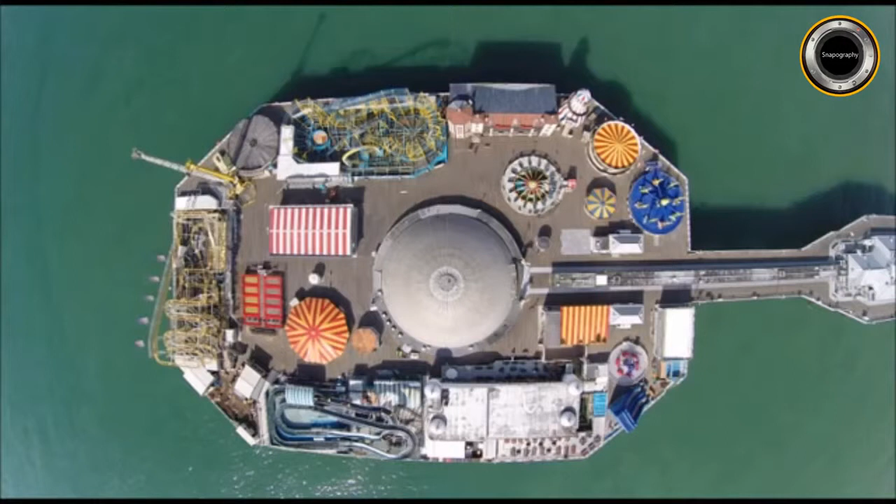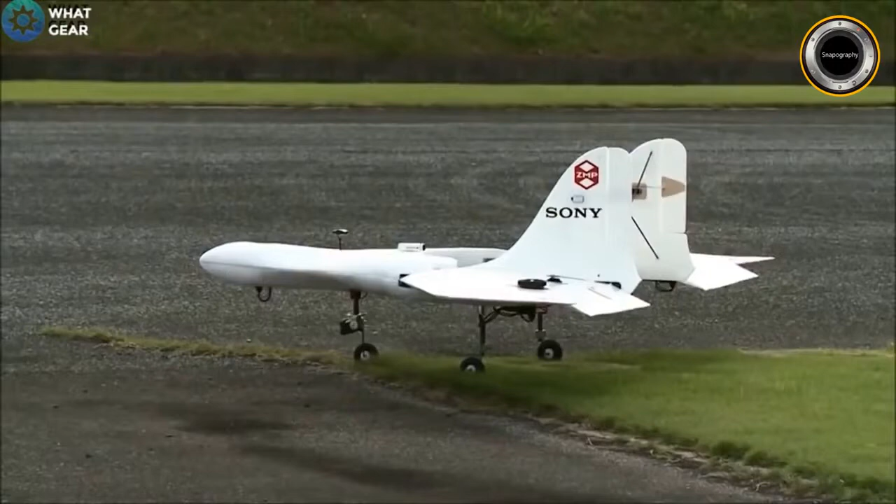Sony have partnered up with the robotic startup company ZMP in a joint venture they're calling AeroSense. Together they've created this amazing aircraft drone which has the ability to take off vertically, just like that Lockheed Martin F-35 fighter featured in Die Hard 4.0.

And before any of you remote control model airplane fans get excited, don't, because this aircraft will not be for the consumer market. They'll only be available to businesses for recon and surveillance purposes.

It's been said that this drone can carry up to 22 pounds and fly for 2 hours straight at speeds of up to 106 miles per hour, which means that in theory, you could send this down the shop, pick you up a 6-pack of beers and fly them straight back to you before you even put your feet up to watch the game. But something tells me that will probably never happen.

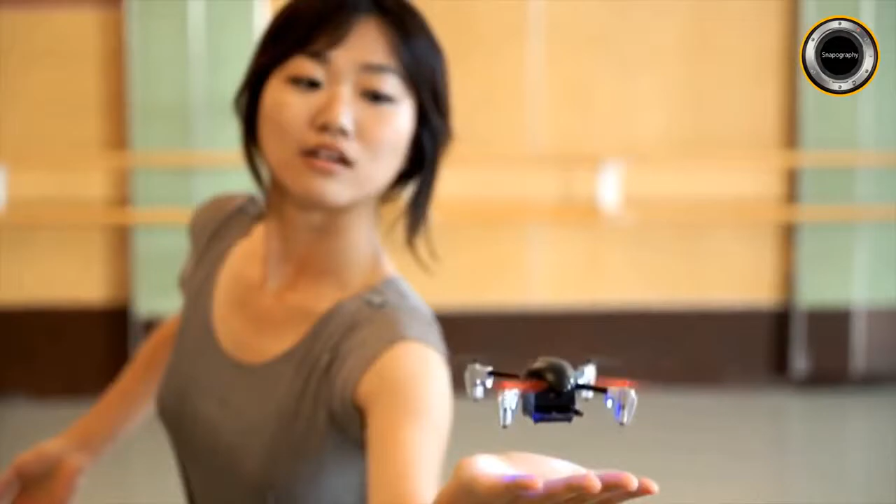When we began on Microdrone, our aim was to create a small-size, personal drone that was affordable, durable, easy to fly, that works straight out of the box. A drone for everyone. Whether you fly Microdrone in extreme conditions, like on a windy beach, or in delicate ones, like inside your home, with its precision control, flexibility, and durability, you can fly it anywhere, no matter your age or flying experience. There's no other drone like it.

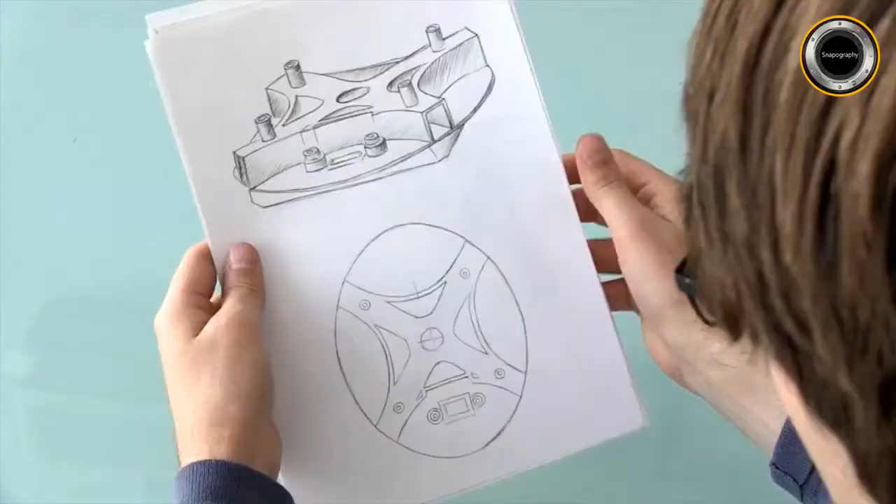We're ready to make Microdrone 3.0. It's designed with drone enthusiasts and excellent engineers from around the world. Components are easily expandable, upgradable, and replaceable. It's also the smallest drone to currently carry a mechanical gimbal.

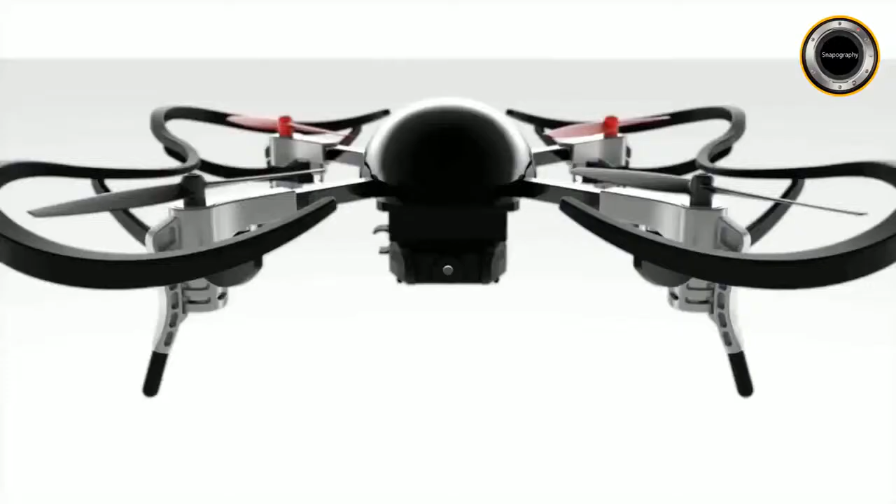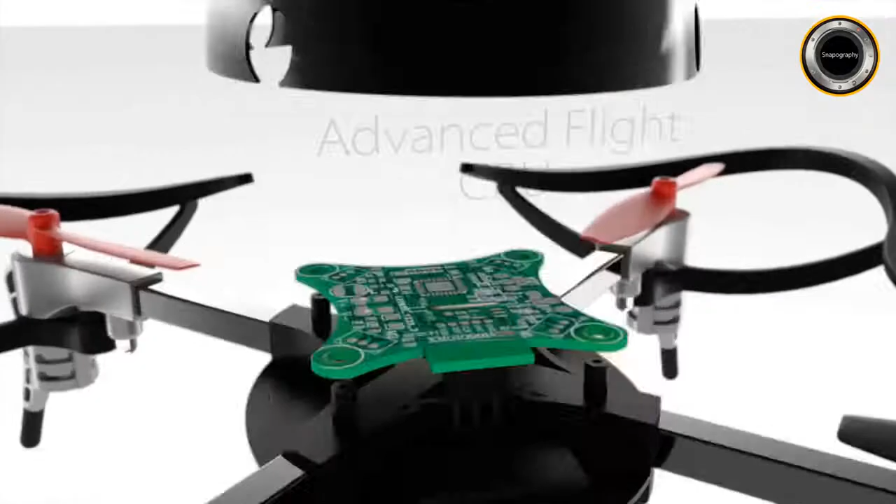The HD camera streams live footage to your smartphone. The batteries slide in and out for quick hot swapping. And the plug-and-play smart modules simply snap on with magnets. Since everything either snaps or slides in, the structure is sleek, aerodynamic, and beautiful.

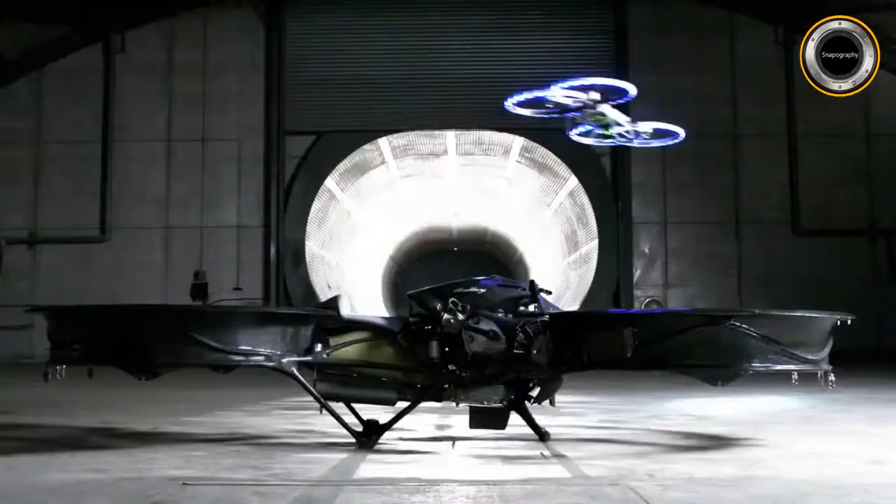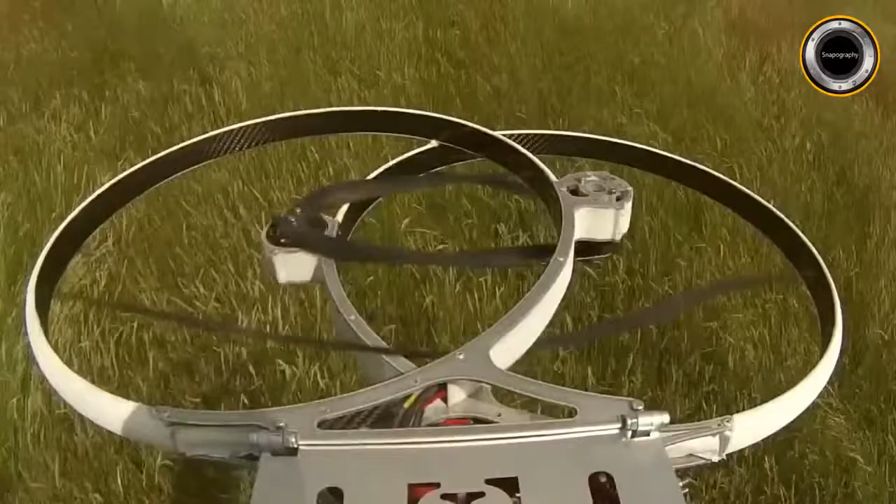We created a 1/3 scale hoverbike drone to test a new quad aerodynamic concept. Our drone will allow you to see and feel just how it will be to fly the full-scale hoverbike, and will help with raising the funds needed to bring the hoverbike to market.

We have moved to a proven quadcopter design, and this is what our second-generation hoverbike looks like.

Drones should be friendly and approachable. Our drone has ducts around the propellers that protect bystanders from the blade tips and allows us to safely operate near the vehicle. We designed a large payload bay that can be easily adapted for different uses, a real multi-purpose tool.

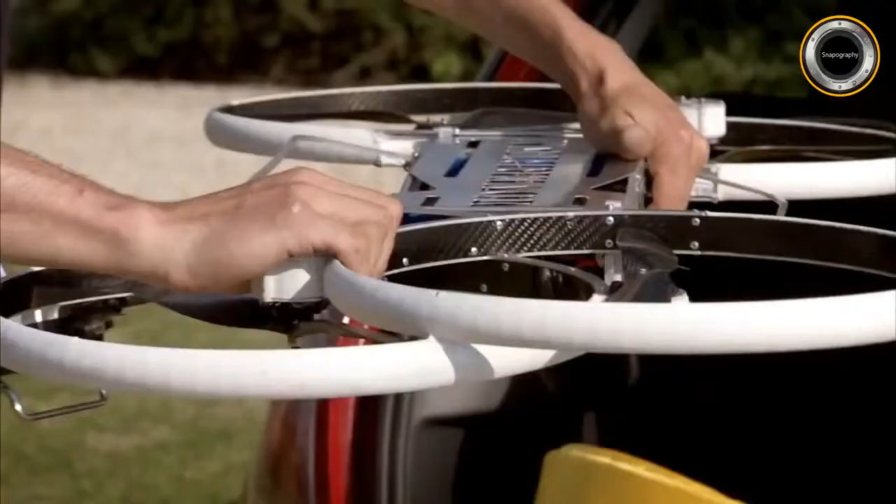Unlike other multicopters, ours packs down to 1/3 of its size and can be easily transported in our custom multi-use bag. We don't think the world has seen yet just how useful drones of all shapes and sizes can actually be. The ducts come embedded with LED lights for brilliant nighttime flying.

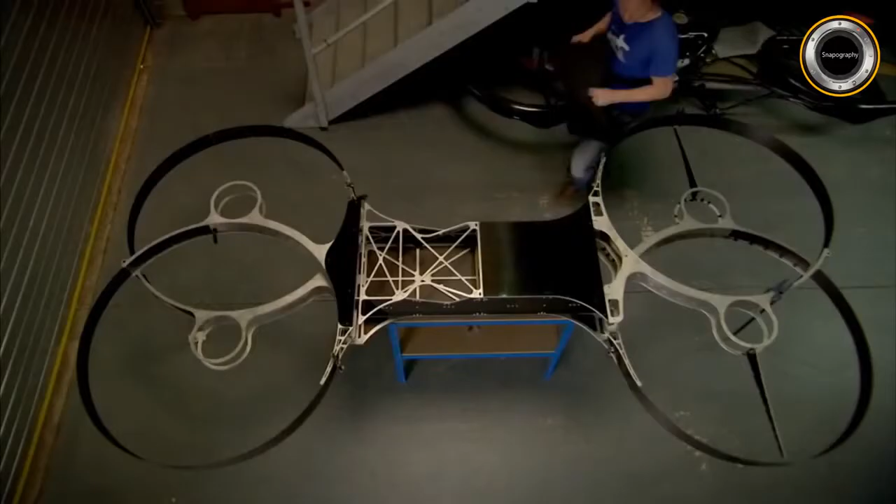We and our large community of supporters around the world are really passionate about the idea of cheap, safe, airborne transportation. With your help to back this project, we can continue to develop the world's first flying motorbike. With your help, we can take another small step in the evolution of flight.

Why confine yourself to stationary videos or a ground-level perspective? The AirDog takes things to a whole new level. It's a totally hassle-free way to get unreal footage.

You don't need remote control skills. You don't need to operate the drone. You just need to concentrate on your best performance. AirDog does the rest.

Put the air leash on your wrist or helmet, turn the AirDog and remote on, press takeoff, and you're done. Let the games begin. AirDog is now in action.

You can make any necessary altitude adjustments or set the distance and angle, and you're good to go. More advanced features like track or lap recording or specific flight modes can be configured or uploaded from a smartphone app.

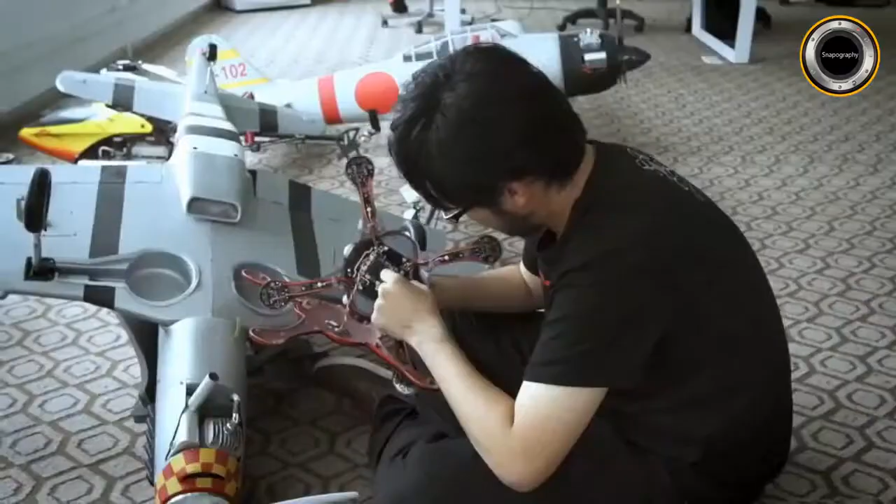I'm Derek. I'm passionate about drones, and I've met many people who want to fly drones but found them really hard to control. I want to help because I feel that they're missing out on the fun of aerial filming. That's why we came up with the idea of Ghost.

This is a traditional remote controller. It has many switches and knobs, which can be very hard to master. One bad move and a mistake can be very expensive. Most drones also require assembling, but not everyone has the time or skills to do that.

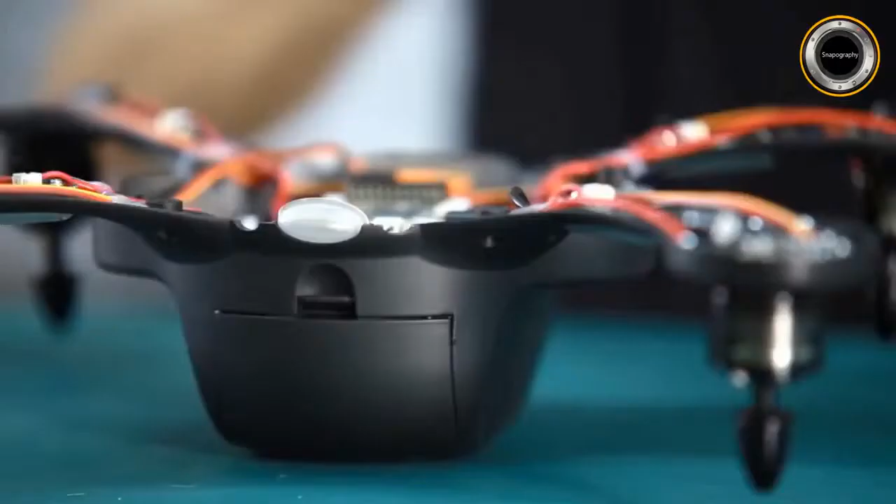Ghost comes pre-assembled and is ready to fly right out of the box. Our app makes it super easy to pilot. Simply tap, unlock, then take off, and Ghost will rise and hover.

Now tap a spot on the map, and Ghost will fly there immediately. To get it back, just hit return, and Ghost will take the shortest route back to its takeoff point. Press land, and Ghost will descend and land gently.

For advanced control, tap hover to make Ghost hold the current spot and enter the micro control mode. Here, you can adjust Ghost's direction, speed, camera angles, and more. Not only is Ghost user-friendly, it's designed with quality parts.

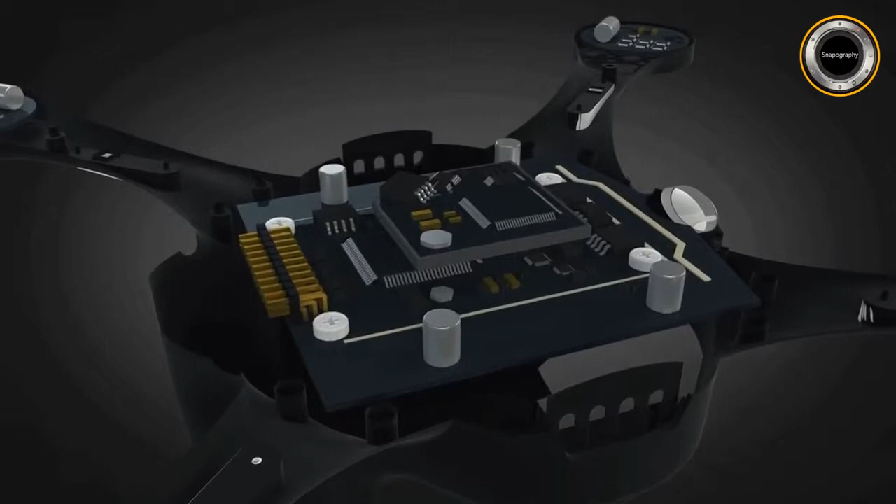And it has great features and performance.

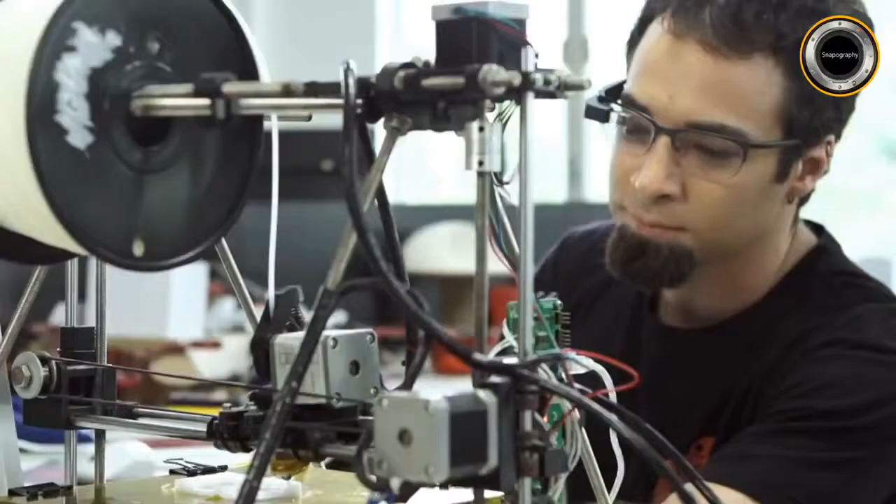What's really cool about the Ghost, though, is its customizability with respect to both hardware and software. One project that I'm working on is mounting this RP LiDAR unit from RoboPeak on the Ghost drone, giving it the ability to sense its surroundings.

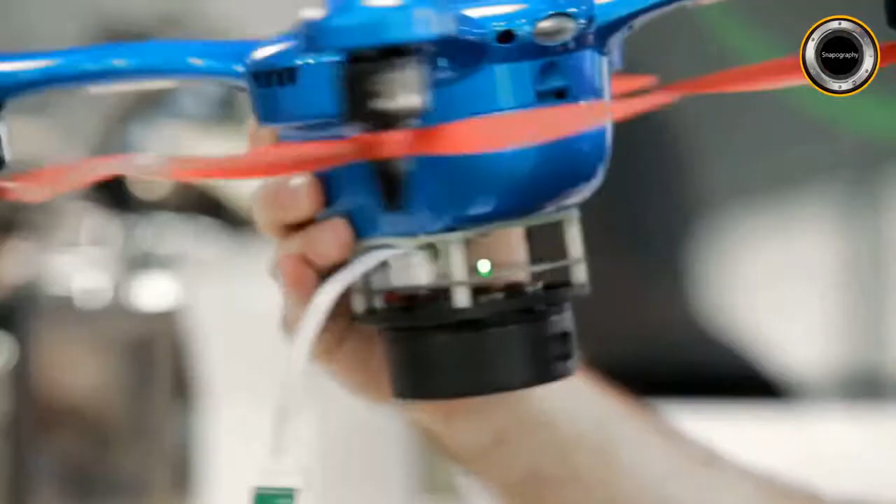With the data from the LiDAR, the Ghost will be able to detect obstacles like trees and buildings and adjust its flight path as necessary. I'm also really looking forward to developing the Ghost SDK, which includes libraries for both Java and C#. I also see some awesome integration possibilities with input devices like Leap Motion, Myo, and my own device, Tact.

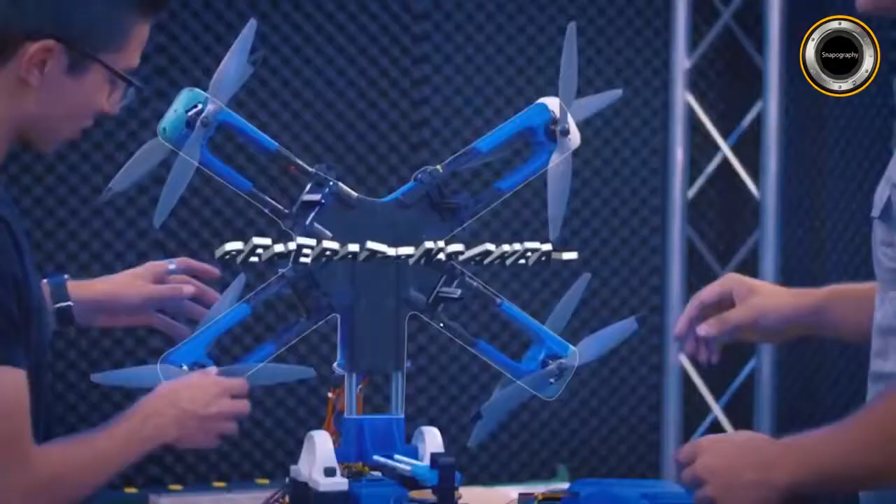Right now, the PlexiDrone is in the final stages of getting ready for manufacturing. We believe that the PlexiDrone that our backers are going to receive is generations ahead of what our backers originally saw during the crowdfunding campaign. We have taken every opportunity to improve every element of the PlexiDrone within our means.

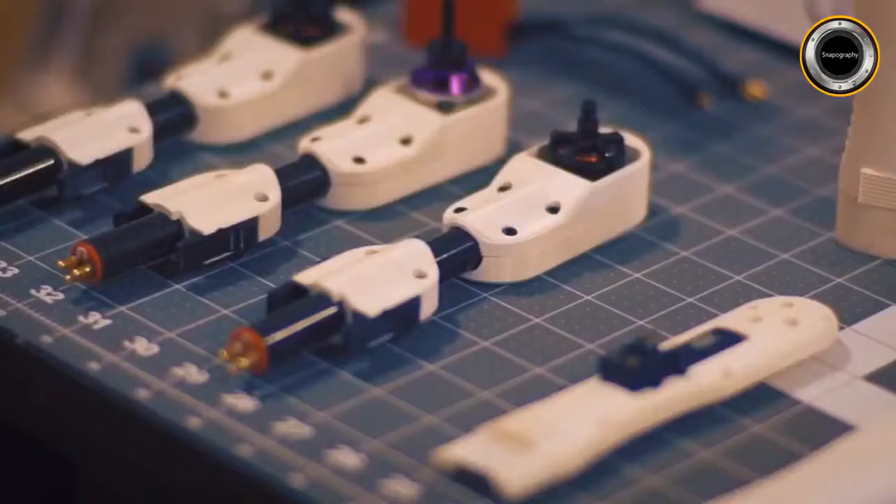The original PlexiDrone was 3D printed, but it wasn't designed for manufacturing. We really went back and rethought a couple of things and thought, we're going to go back and make these changes for manufacturing. What else can we make better at the same time?

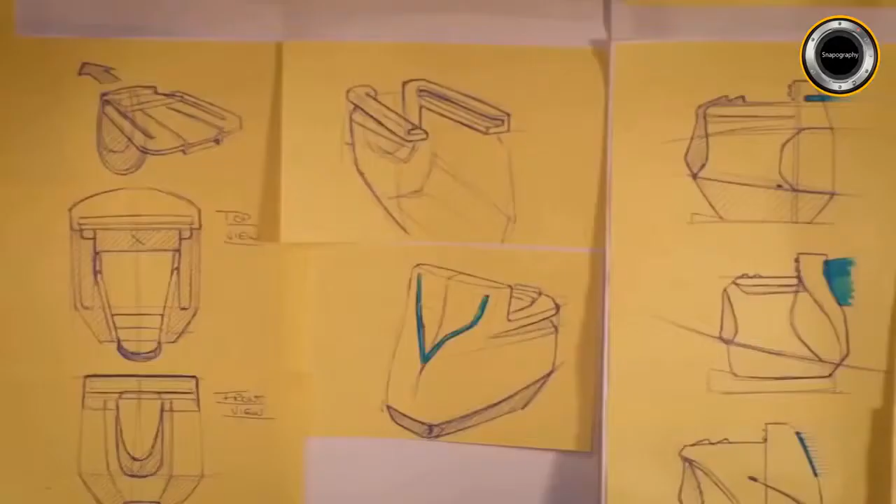The new upgrades and features for the PlexiDrone include our brand new landing gear. We added dampeners at the bottom so they'll actually absorb the impact when you're landing and your camera will still be nice and safe. We've taken a payload clip so that you can buy custom payloads from developers. They can essentially add anything that their heart desires to their drone.

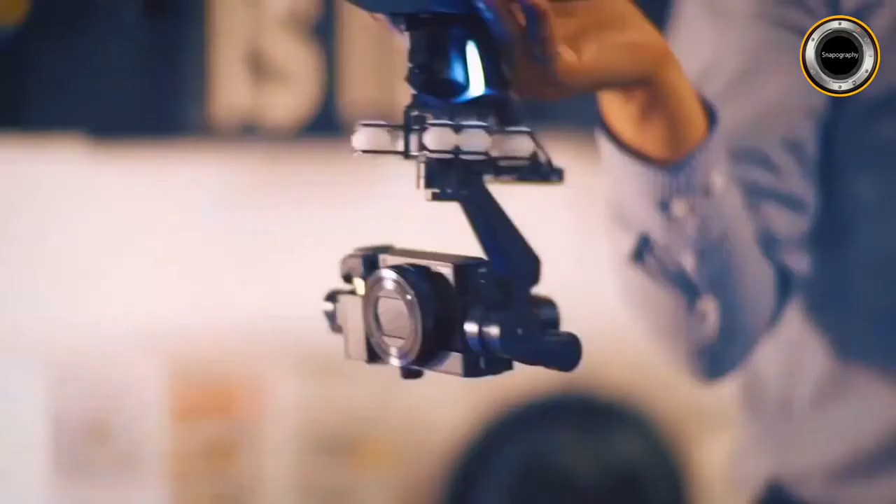If you want to add an RP LiDAR, you can. If you want to add your own scanner, you can. You want to add a speaker, go for it. It's possible. We've increased the reliability of every component, custom motors, custom propellers, custom electronics, pretty much in every element of the design.

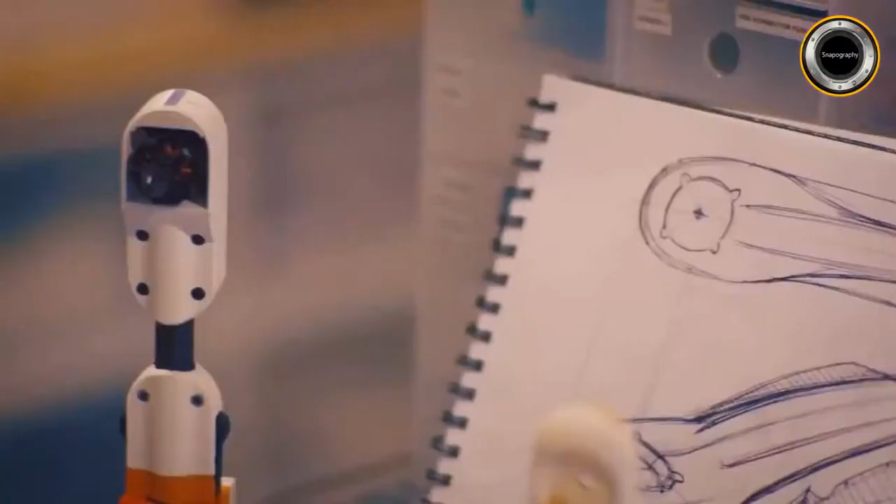The plastics have been designed not just for functionality, but for durability. We've gotten rid of all of the hobby grade parts and made sure that only the top quality parts are here for you.

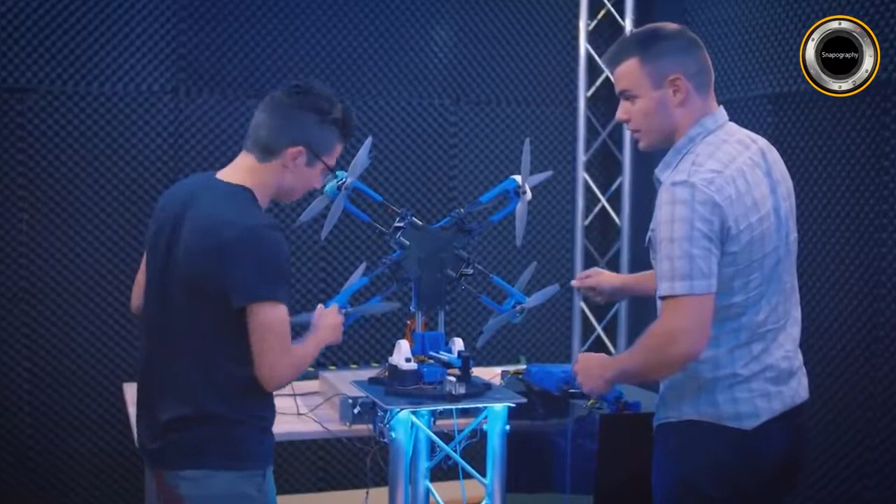We don't let anything go to manufacturing until it's perfect. It's redesigned, it's re-prototyped, it's re-evaluated, design changes are made until everything is absolutely perfect. The original PlexiDrone is a starting point for where we have taken it. And I think they're going to be blown away with the results.

There's going to be a couple of surprises when you receive your PlexiDrone. There are things that we are delivering that our competitors are still not able to give to you. And by the time that you receive your PlexiDrone, you're going to have something that nobody else has.

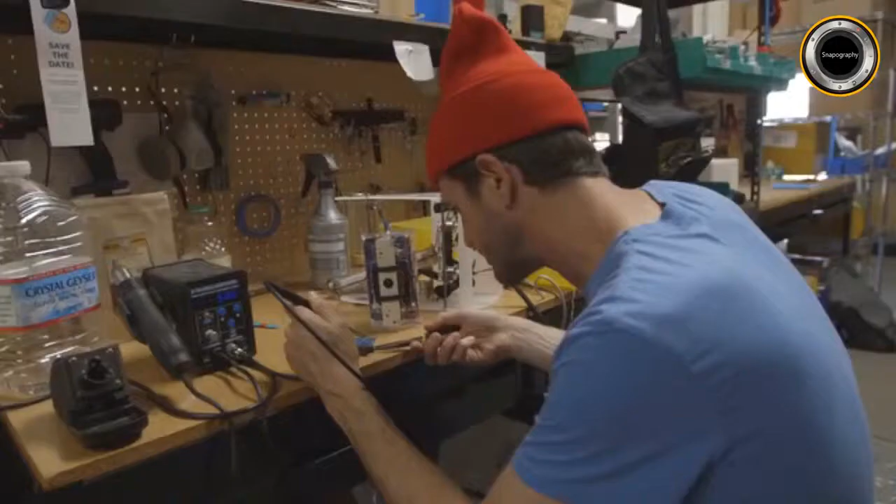Three years ago, we came to you, to Kickstarter, and told you about our dream to make a low-cost underwater robot. We wanted to make underwater exploration accessible to everybody. A lot has happened in the past 3 years. We've shipped thousands of these robots to 50 countries, every continent. And most importantly, we've built this community of people who are obsessed with pushing the boundaries of what's possible. So for the last 3 years, we've been working on how to make underwater exploration tools the right way. And what we've come up with is something we are extremely excited to announce. This is the Trident.

At OpenROV, we believe that exploration is not just about gathering data, but also about experiencing new worlds in a new way. We've designed Trident to be extremely fun to fly. Most ROVs move up and down slowly, go left and right, forward and reverse. Trident is nothing like that. It flies like an airplane. It speeds along, you can bank, you can dive. It's fun to fly. It goes fast when you want it to, but it can slow down and be precise when you have something you want to inspect.

Getting video from underwater has always been a challenge because radio waves don't travel through water. So we've developed a very lightweight, neutrally buoyant tether which communicates the video feed from the ROV up to the surface. That attaches to a wireless buoy, which allows you to control the ROV from any Wi-Fi connected device, like a tablet, a laptop, or even a VR device like an Oculus Rift or a Google Cardboard.

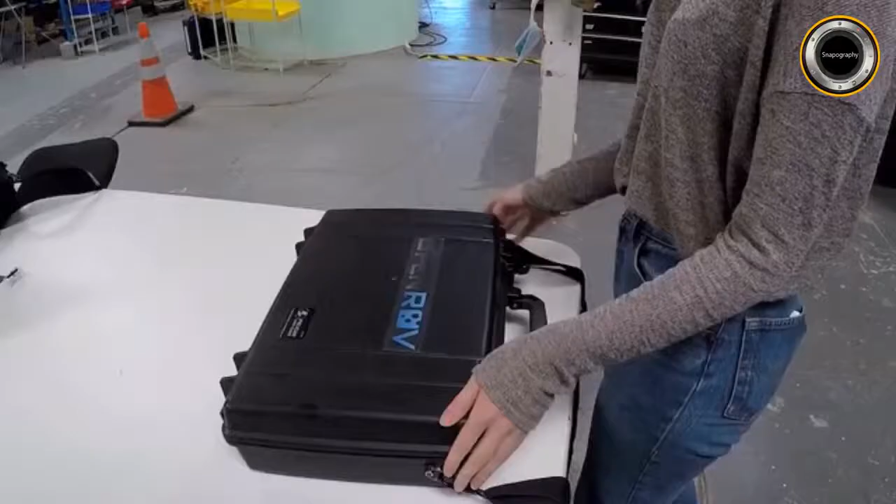We wanted an ROV that could go to places no ROV had been before. So we designed it to be ultra portable, whether you're hiking to high alpine lakes or bringing it as carry-on luggage. It goes wherever you go.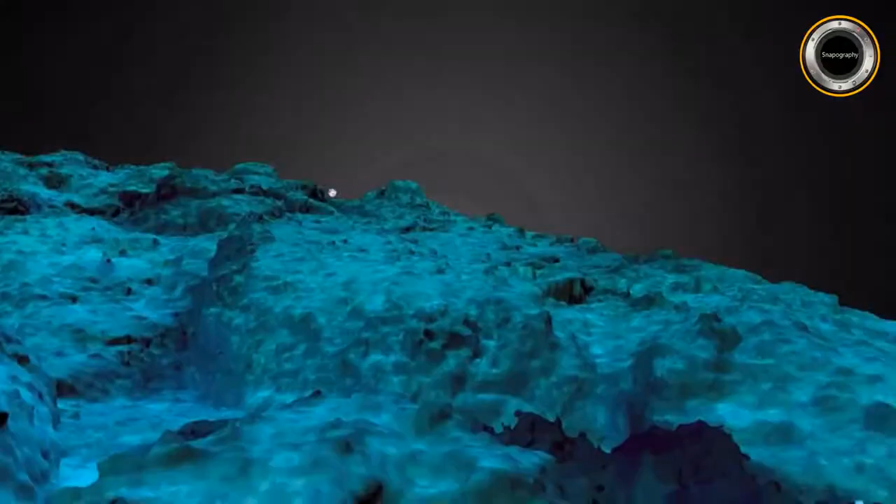Most ROVs are designed to look in specific places where you already know where the target is, but we've realized that a lot of people want to explore with an ROV. We've designed Trident to be extremely hydrodynamic and excellent at going in long, straight lines. This allows you to do lawnmower patterns, being able to broadly explore a place you've never seen before and find out what's there. We've seen community members take this model and create 3D visualizations of the seafloor. Using technologies like photogrammetry and structure from motion, we hope we can help create maps of the underwater world that will allow us to see it in a completely new light.

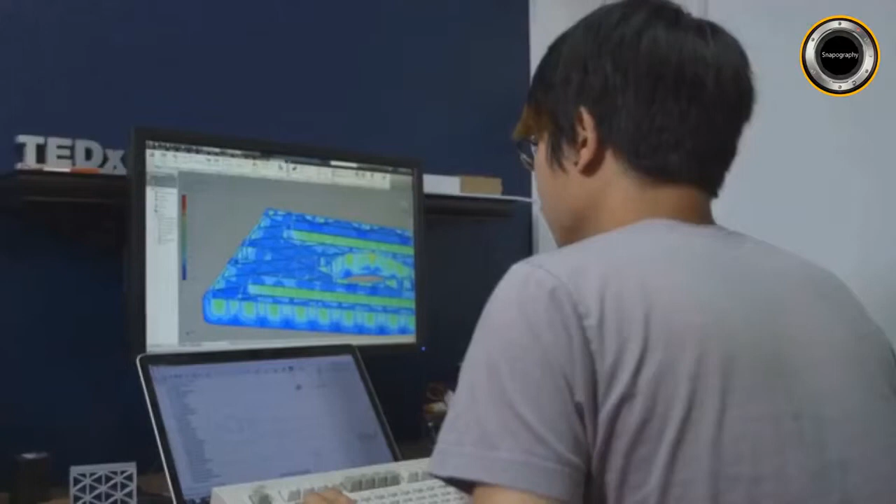I joined this project when it was the initial Kickstarter, and I did it because it was going to be a chance to take this hardware, these robots, and use my software skills to actually program them and have them do stuff underwater. I've been using that to build a platform now that lets other software geeks like myself contribute and help programmers find ways to control robots.

We've made a plug-in architecture that allows you to add your own components, add new sensors, new technology to an ROV after it's already been developed and out in the field. The OpenROV software is bigger than any single ROV. It's opening the door to services and technologies that we're just now scratching the surface of, from mapping to autonomous computer control to imaging reefs and underwater shipwrecks in 3D. We're going to be able to send this data and utilize cloud computing, mesh networking, and all kinds of future technologies to make it available to everybody. So whether you're a fisherman, a researcher, a recreational boater, or just someone who's curious about what's below the surface, this is the tool for you.